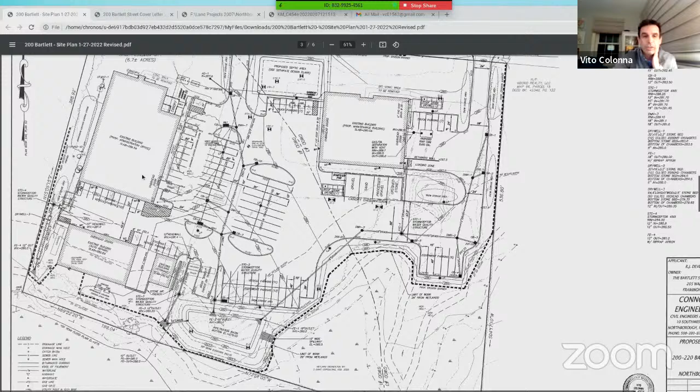The main question was roof runoff and potential for infiltration for the two buildings on the left-hand side. Lamy's is the back building, and this front one is what they're calling the administrative building. We wanted to talk to the LSP first before we did any infiltration there, because that's the area of residual contamination from years back. Based on their input, they didn't recommend infiltration around this building itself. The source was over on this side, and right now they've picked up some residual around these areas, and up front would be upgradient, so they didn't want to push anything further away.

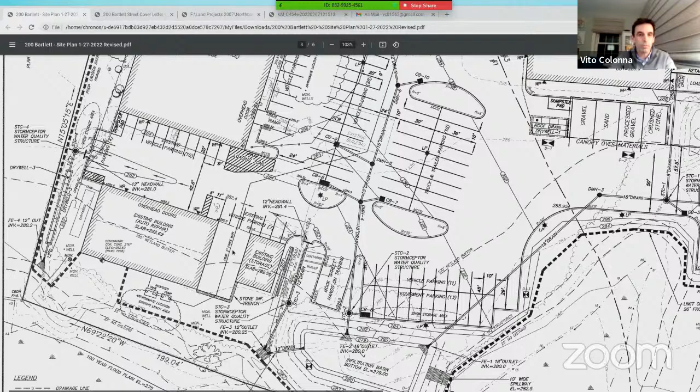The contamination is down about 50 feet or so, I think, so they're not too concerned with infiltration, but just to be safe they felt we should stay away from immediate areas near the building. So we added some infiltration down the edge over here, added some Cultec in line on the drainage system. They're all pre-treated through a Stormceptor water quality structure first, and then get infiltration there. We also did some lower impact infiltration - this building here we took a stone trench along the edge to get this half of the roof, and a stone trench along the edge of the pavement to get this half of the roof, and this small paved area in here. So we added infiltration where we could to maximize that, but wanted to stay away from those areas of potential contamination. Those are really the only revisions we made on the plans.

Okay, I'm just reading through some of the notes here. Yeah, no, overall it's a huge site improvement. So that's all positive.

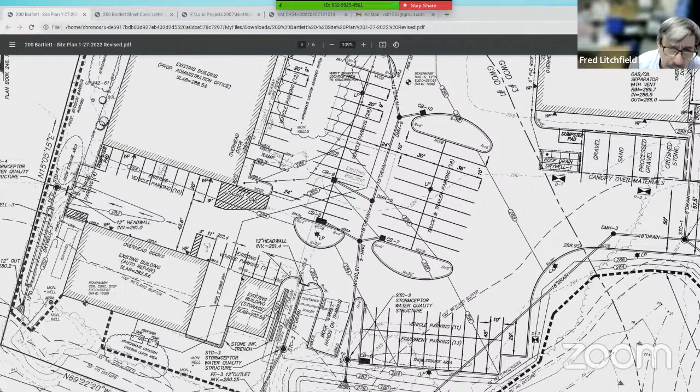Fred, you have any questions around the runoff we just talked about, the roof work - that seemed good to you? No, it seems good. I just wanted to make sure there was some pre-treatment before any water captured from the parking lot went into the infiltration areas. Vito and I talked earlier today, and he confirmed there was pre-treatment in that one section next to the small building near Lamy's, where water is gathered from that small paved surface. Actually, I even think there's a fence in front of that property, just to the right of the Lamy Automotive building - or there was, well there is today. Yes, so I'm okay with that. I will get another crack at it before the planning board hears it as well, so we'll make sure the plans are the same, and if they change in any way, ask them to come back and revise them with the commission.

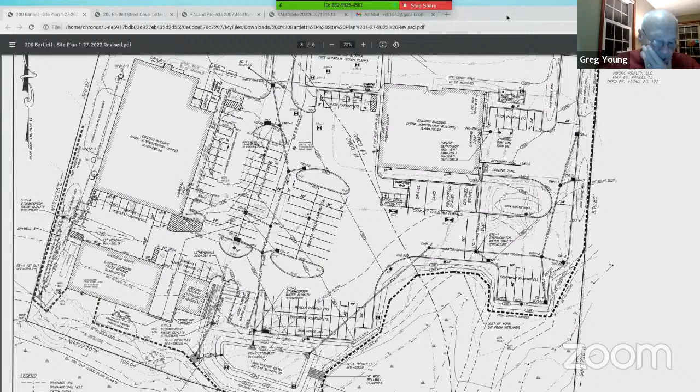The special conditions we were talking about were six of them: some permanent markers, weekly street sweeping as needed during construction, an O&M plan for stormwater, a pre-construction conference - I would think that'd be pretty standard operating procedure - an environmental monitor assigned with contact info given to the commission prior to start of work, and lastly a SWPPP and weekly SWPPP reports. Yep, those all seem reasonable, Vito? Yep, those sound good, no problem.

Any question from the commission on the updates here? Questions, concerns? All look good to you, Tom? Good with me, yeah, I think it's great. Get that location rehabbed.

Okay, let's check with the public here, see if we have any questions, any hands up. I don't see any hands up or comments. No, okay, we're good there.

The other question here is, this is a stormwater permit too, right? Yes. So Fred, this was me asking, should we record the stormwater permit as a separate documentation with the O&M plan, or do we attach it to the order with one recorded document?

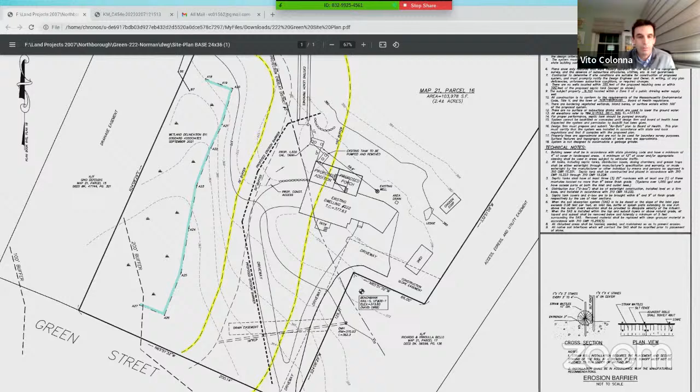Okay. Vito, who did the delineation? That was Goddard. Goddard did it? Yeah, they did it in September.

One of the items here that Mia brought up was that she couldn't confirm the delineations because of snow cover, but she did confirm that everything is outside the 35. So the recommendation was to move ahead, and if the commission were to approve this, make a note that the wetland boundaries were not confirmed as part of this order. Yeah, I think you can tell it's at the toe of slope when you're out there, but it's maybe tough to get an exact location of it. But just knowing it's the toe of slope, we're outside that zone.

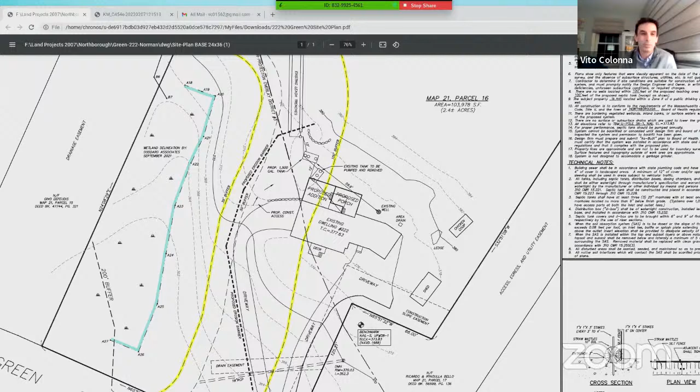Questions from the commission? Comments or concerns? None for me. Is approving an order but not approving the formal delineation unusual? I think we've had it before, and if you put it in the findings of fact, we've had it on a few projects in the past. I don't know if it's happened in Northborough or not, but I know we've had it in similar situations where it's winter or they can't really access it, or sometimes it's on an abutter's property that won't give permission. So we've had that too. Okay, as long as it's noted in there, I think you're covered.

I think it's important to note, as Mia indicated in her memo, that if you don't make a note that says you're not approving the boundary line, then it's assumed to be approved. So you want to make sure that it's specifically stated in the special conditions or the findings of fact that this order does not confirm the line. Okay.

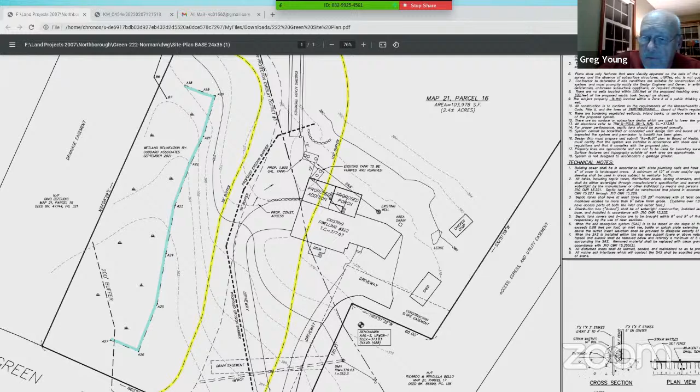All right. I'm good. Anybody else have any questions or concerns here? I don't see any. No shaking heads. It's fine to me. Okay, all right, then let's move forward.

Let's close the hearing as a start. Make a motion to close the hearing for 222 Green Street. Second, seconded by Todd. Roll call. Todd Helwig, yes. Diane Goldner, yes. Tom Beals, yes. Dan Clark, yes. Kelly Marston, yes. And I vote yes. Hearing is now closed.

Is there a motion on the floor? Make a motion to issue order of conditions for 222 Green Street with the condition that the wetlands line or delineation has not been confirmed. Second. Roll call. Todd Helwig, yes. Diane Goldner, yes. Tom Beals, yes. Dan Clark, yes. Kelly Marston, yes. And I vote yes.

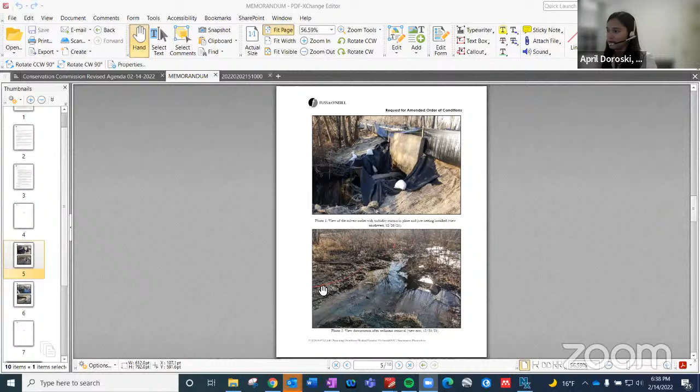I will share my screen. Can everyone see this? This is the result of the work that's happened so far. This is the outlet of the culvert, and this is a turbidity curtain that was installed. You can see the erosion control jute nets along the banks. This is a view downstream after the sediment was removed. There was sediment identified in some areas over here on the left and also over on the right.

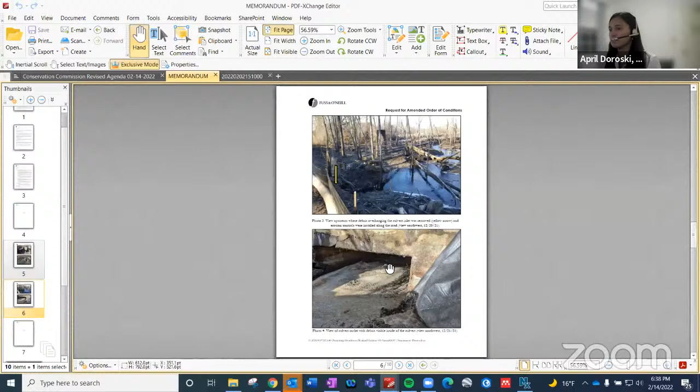This is a view upstream of the formerly impounded area. You can see there's erosion controls along the road—that was part of the initial stabilization. This bottom picture is of the culvert in its current condition. If you look in a bit, you can see there's still some debris left in there. That is part of the reason why we're here today requesting the amended order of conditions.

Essentially what the plan is to remove the remaining debris from the culvert because it's still partially filled, and also restore the wetland areas in the immediate vicinity of the culvert. So again, on this left side, this was the former impoundment area, and I'll just describe the restoration we're proposing as part of this from upstream.

April, before you do the restoration piece, let's talk about the culvert for a second. Sure. What's the plan to clear that out? We're not going to use the contractor with the sledgehammer approach this time, right? No, it will be a much more controlled activity where they'll go in and essentially pull the material out and then manually remove it and load it into a dump truck or loader that's on the road. So nothing is going to be stockpiled in the wetland—it will be immediately loaded to be removed or put in an upland area.

As part of that, right now the turbidity curtain remains, and I'll just zoom in—it's approximately in this area. If that needs to move down further downstream to access the culvert, we might end up doing that just to be able to get in there. The debris is about 5 feet in. So that's the general plan.

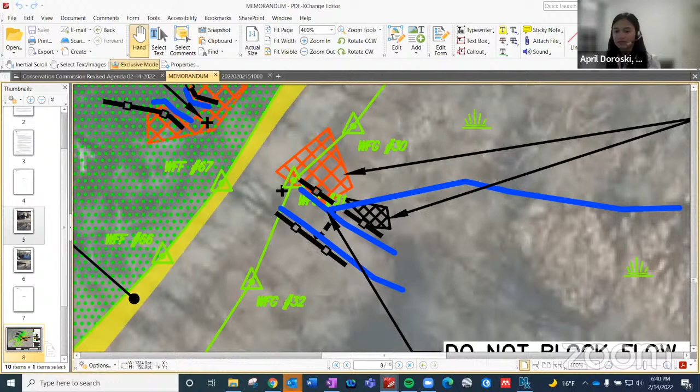So again, keep those erosion controls and the turbidity curtain in place.

Starting with the wetlands, we propose putting down some wetland seed mix in the upgradient portion. This was formerly impounded, so now it's kind of an exposed area. We believe it would naturally revegetate, but we want to kickstart that process as quickly as possible.

That's why we're proposing seeding in the vicinity upstream of the culvert to help that process move along a bit faster. In addition, when we're looking at where we're restoring the banks, these black lines show where we're proposing putting coir logs - those coconut rolls that are biodegradable, to stabilize the channel and also help direct the flow into the culvert.

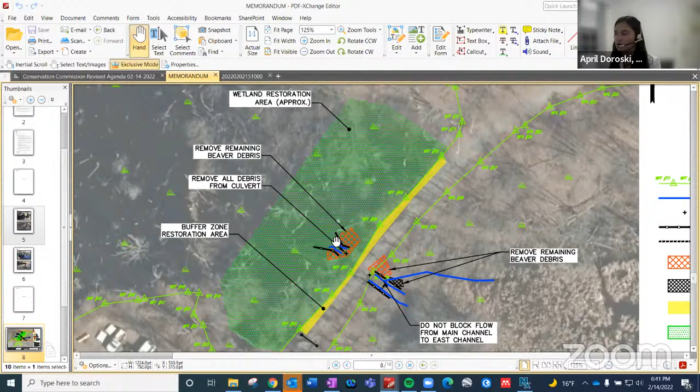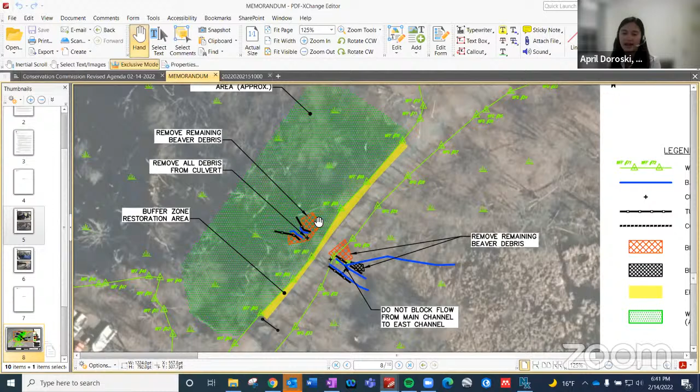And installing live stakes, either willows or silky dogwood. They're commonly used for bank stabilization, installing those along the banks as well. There is some beaver debris remaining around the culvert, so we'd make sure to get all of that out first before doing that restoration.

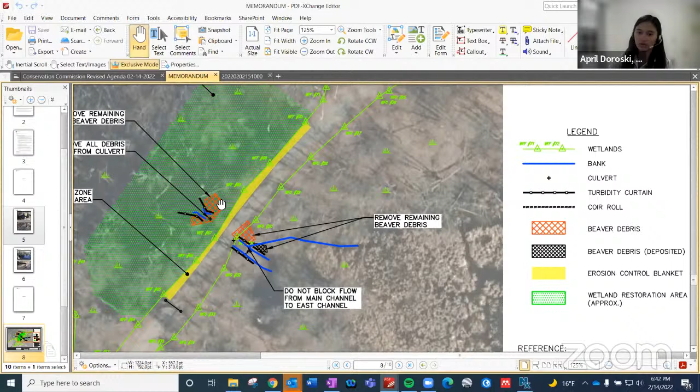This yellow area is where we're proposing to put an erosion control blanket. That's essentially the upland area, the road embankment - it's pretty steep and built up. So wherever it's dirt and not pavement, we want to try and stabilize that with the erosion control blanket that'll go to the base of the road embankment, and then seed atop of that, which is a pretty standard practice.

Very similar activities for downstream - removing any beaver debris remaining and hauling that off site, and installing those coir logs along the bank again to promote the stabilization of the banks and keep the channel flow as is.

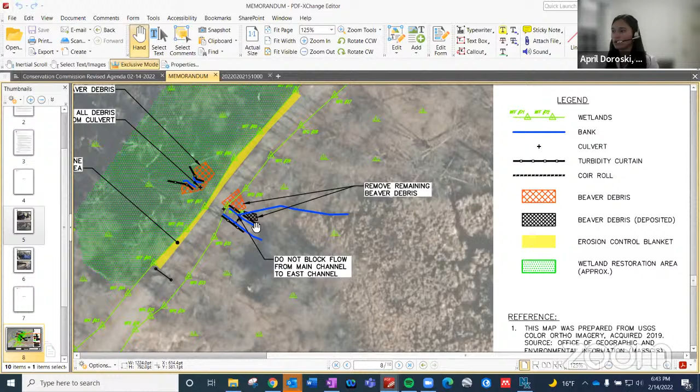We did write a note to make sure there's another stream that flows out, to make sure the flow can be accessed through that stream as well. So there'd be a break in the coir logs at that location. That is the general plan for restoration.

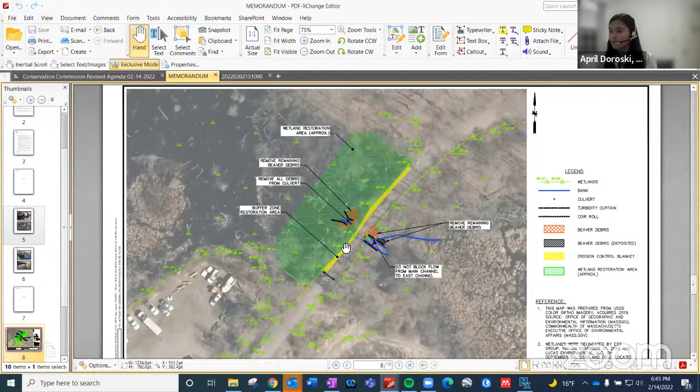Are there any questions? Does the commission have questions or comments?

I guess my only thought or question is, I would think it would be in everybody's best interest to put something in there to prevent further beaver activity after you do all this great work, if they come back in a month and fill it back in again.

If I may address that - this demo project, this is the scope of work that we think is appropriate to have as part of that project. Separately, we're working on a plan which is not yet completed in terms of setup, where DCAMM intends to address the beavers as a long-term project that will include removal of the beavers. But that's on a parallel but slightly separate track, Commissioner.

Okay. The only question I have - are the beavers still there, or are they actively being managed right now? Because you want to spread all the seed, but if it just floods because beavers are still present, I didn't know if we have to wait for the beavers to be gone before we start planting.

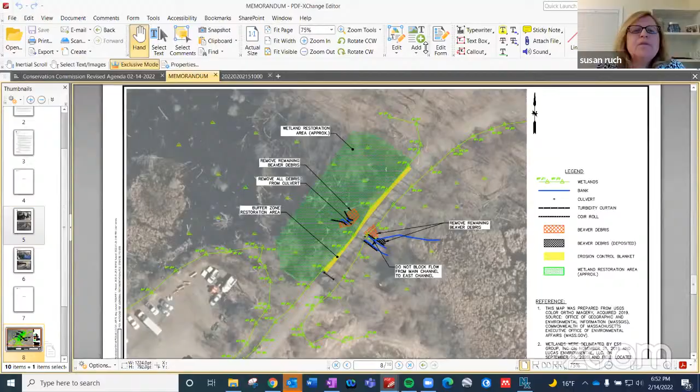The concern we have with that is that we won't be able to make a final payment to the demo contractor until there's a certificate of compliance. And that seems like it's shifting a burden to the wrong party when the burden is on DCAMM to keep good to its promise to have a long-term plan to manage the beavers. That's my concern. I can appreciate that concern, but are you anticipating that the beavers won't be under control before the certificate of compliance is requested? You think there's a possibility that it may not be done by then?

That is not directly the concern. The concern is that the order of conditions is for work being done by one contractor, and this item is not under that contractor's control. We literally would not be able to make final payment to them until they get the certificate of compliance. It's important to DCAMM to timely pay contractors and to close out the contract when that contractor's work is done. They're not going to be doing the beaver management work as part of that project.

So I kind of agree with the applicant. I'm not sure why - we can't force them to control the activities of other biologic actors for perpetuity. They applied for a specific project. They're going to get an order of conditions. They're going to fix this problem. And then the future is going to have to take care of itself.